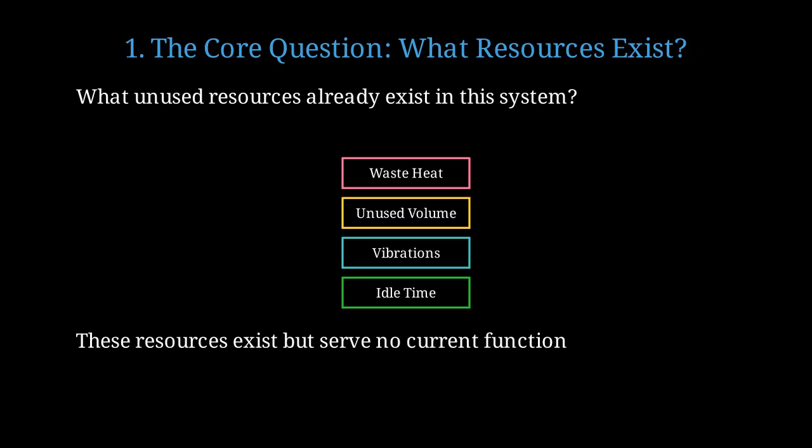Let's start with the fundamental question that drives this entire technique. What unused resources already exist in this system? This single question can unlock tremendous innovation potential. Common unused resources include waste heat from machinery, unused volume in containers, mechanical vibrations, and idle processing time. These resources already exist in our systems, but serve no current function, representing lost opportunities.

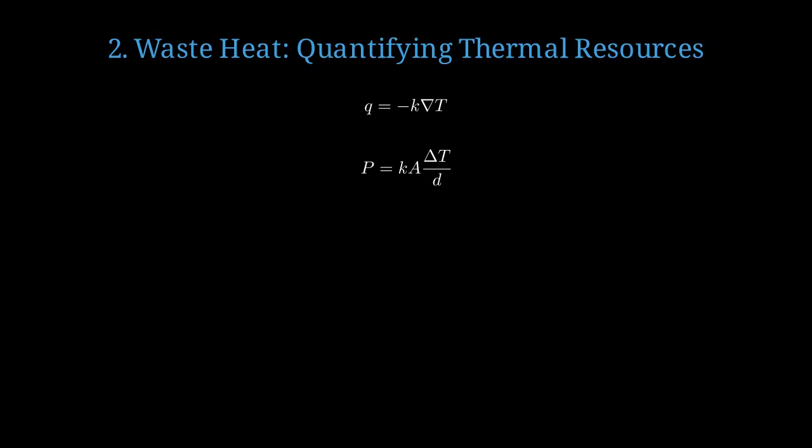Let's examine waste heat, one of the most abundant unused resources in industrial and consumer systems. Fourier's law describes heat transfer, where Q is heat flux, K is thermal conductivity, and nabla T is the temperature gradient. Power available from heat transfer equals thermal conductivity times area times temperature difference divided by distance. Consider a typical industrial motor with a hot surface at 80 degrees Celsius and ambient temperature at 20 degrees, creating a 60-degree gradient.

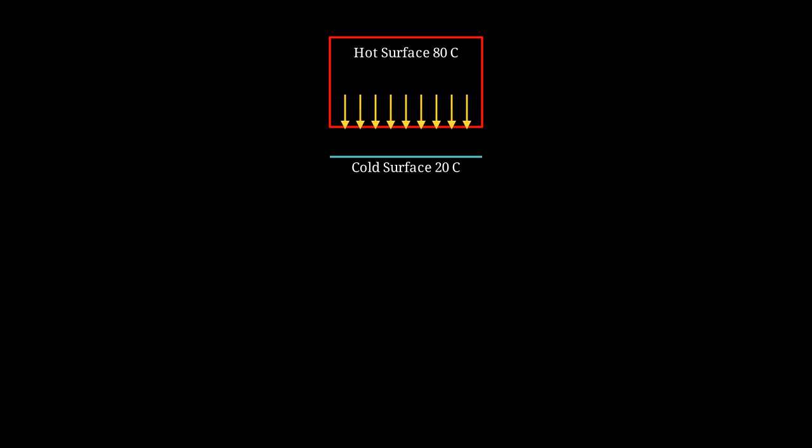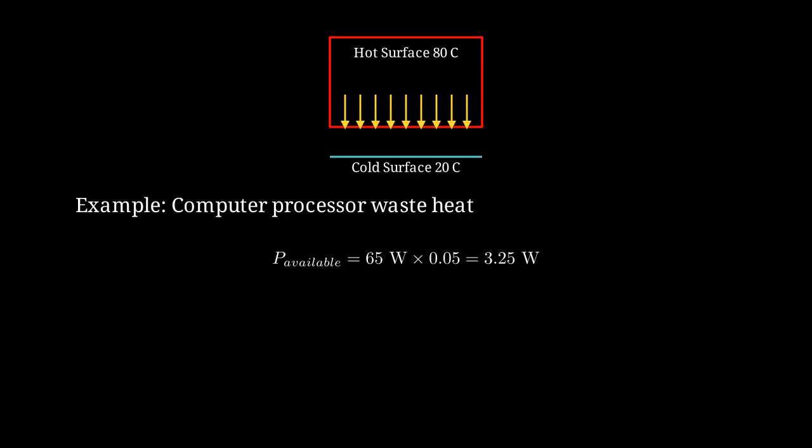A typical computer processor dissipates 65 watts of heat that could potentially be harvested. With thermoelectric generators at 5% efficiency, we can harvest about 3.25 watts from processor waste heat. What resources are we currently throwing away? In data centers, millions of watts of heat energy are simply vented to the atmosphere. A single megawatt data center wastes 8.76 gigawatt hours annually, equivalent to powering 800 homes for a year.

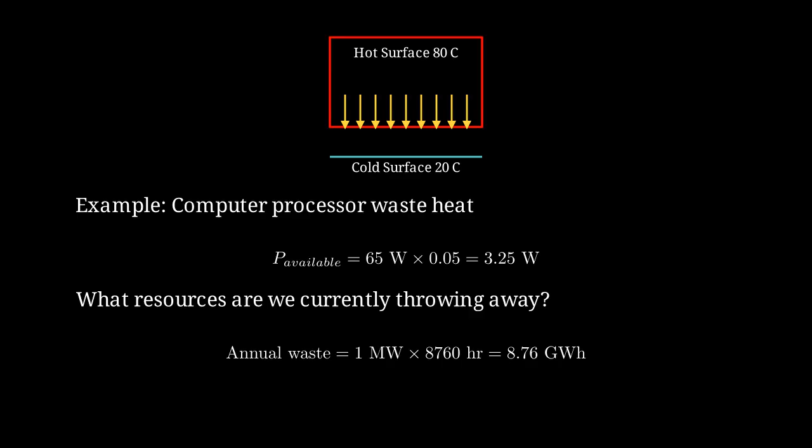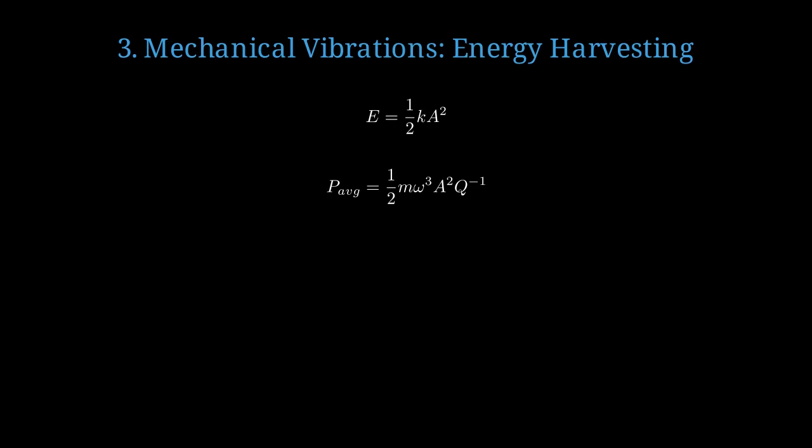Mechanical vibrations represent another significant source of harvestable energy in our environment. The energy stored in a vibrating system equals 1/2 times the spring constant times amplitude squared. Average power from vibration harvesting equals 1/2 times mass times angular frequency cubed times amplitude squared divided by quality factor. A vibrating mass on a spring can be modeled as a harmonic oscillator, with energy oscillating between kinetic and potential forms.

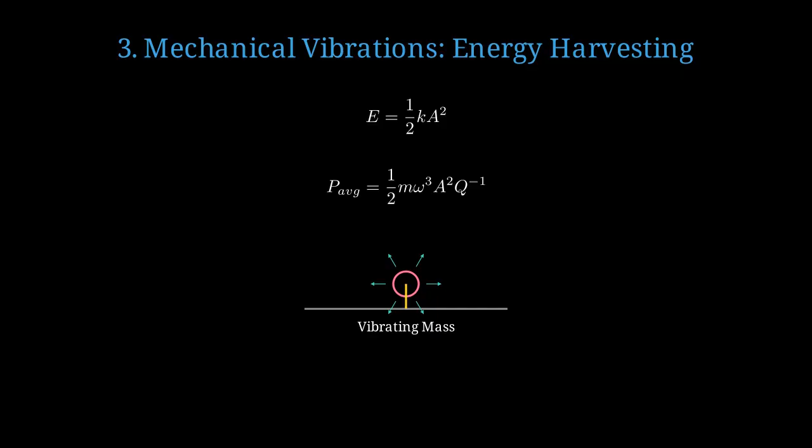Consider bridge vibrations at 50 Hz frequency with 0.5 millimeter amplitude from traffic. A 100-gram harvester on this bridge could generate 0.77 milliwatts, enough to power wireless sensors. Piezoelectric floor tiles in train stations harvest footstep vibrations, generating up to 5 watts per step. With 10,000 steps daily, a busy tile generates 25 kilojoules, powering LED lighting for the area.

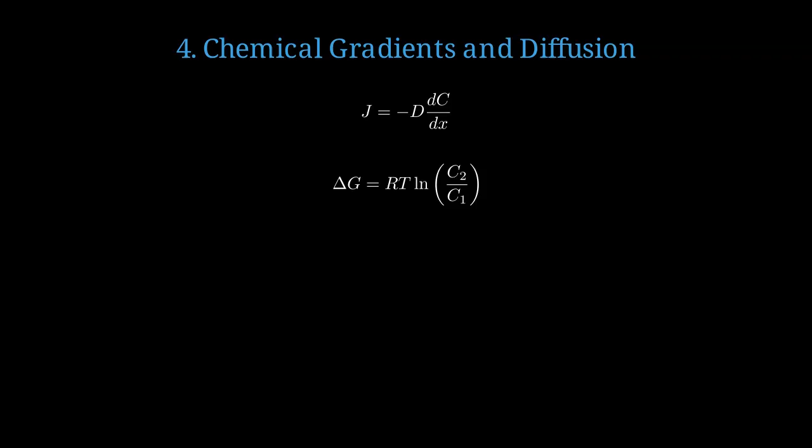Chemical gradients represent stored potential energy that can drive useful processes. Fick's first law describes diffusion, where J is flux, D is diffusion coefficient, and dC over dx is concentration gradient. The Gibbs free energy available from a concentration gradient equals RT times the natural log of the concentration ratio. Molecules naturally flow from high concentration to low concentration regions, and this flow can do useful work.

Where rivers meet oceans, salinity gradients contain enormous energy potential. A river flowing at 1,000 cubic meters per second into the ocean carries 2.3 gigawatts of osmotic power. What resources are we currently throwing away? Global rivers discharge enough salinity gradient energy to power 2 terawatts.

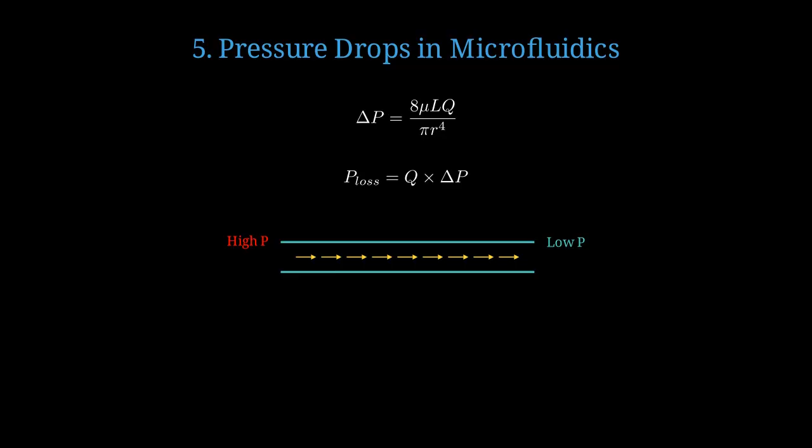Pressure drops in fluid systems represent wasted energy that can be recovered. The Hagen-Poiseuille equation shows pressure drop equals 8 times viscosity times length times flow rate divided by pi times radius to the 4th power. Power loss in a flow system equals volumetric flow rate times pressure drop. Fluid flowing through a channel experiences pressure drop due to viscous friction, dissipating energy as heat.

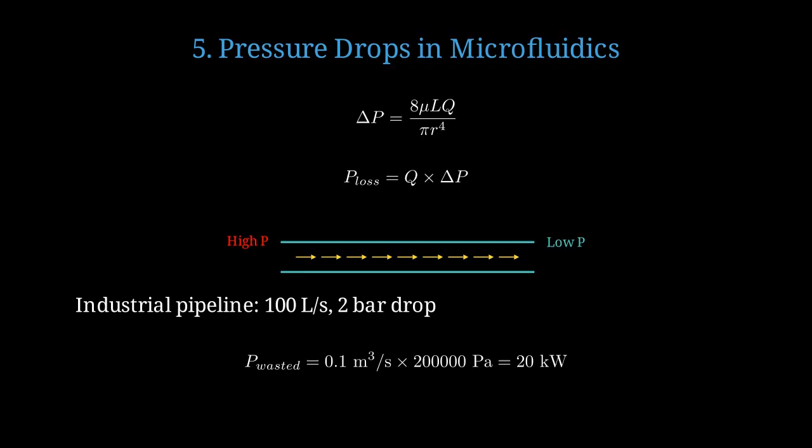Consider an industrial pipeline flowing at 100 liters per second with a 2 bar pressure drop. This system wastes 20 kilowatts continuously, which could be recovered with turbine generators. In microfluidics, we can redesign channels to use pressure drops for passive mixing instead of wasting energy.

Idle time represents an often overlooked resource in computational and manufacturing systems. Most systems alternate between active and idle states, with idle time representing unused processing capacity. System utilization equals active time divided by total time times 100%.

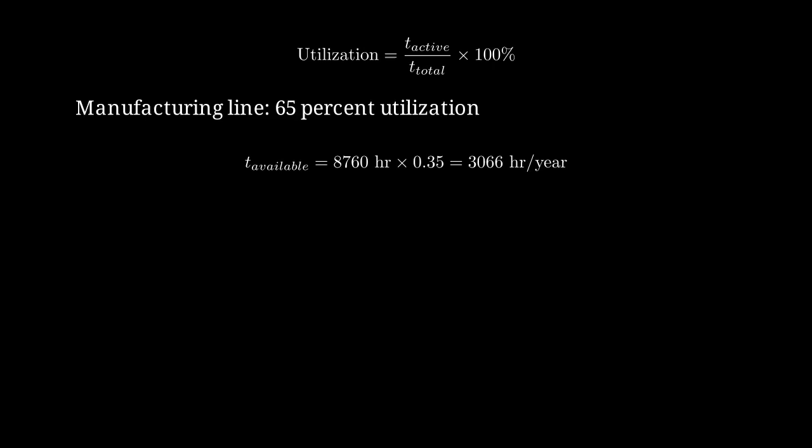A typical manufacturing line operates at 65% utilization, leaving 35% idle time. This represents 3,066 hours per year of unused capacity, equivalent to 128 full production days. By scheduling maintenance, testing, and secondary production during idle periods, we eliminate waste.

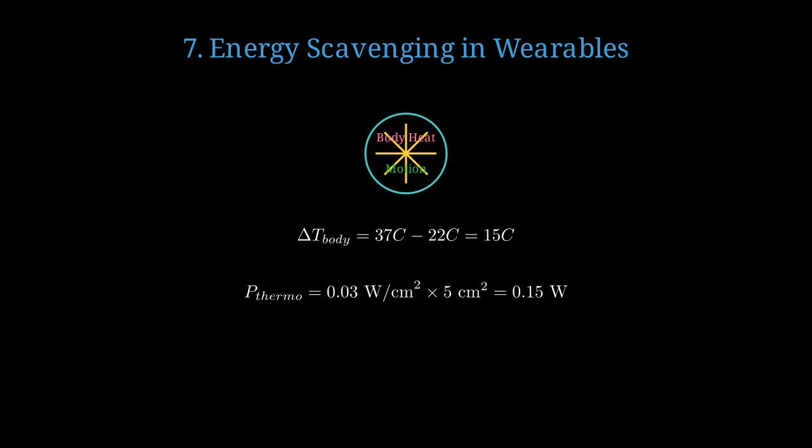Wearable devices demonstrate practical applications of multiple resource harvesting techniques. Wearable devices can harvest body heat through thermoelectrics and motion through piezoelectrics simultaneously. Human body temperature of 37 degrees minus ambient 22 degrees gives a 15 degrees Celsius gradient. A 5 square centimeter thermoelectric generator on skin produces 0.15 watts from body heat.

Human walking generates motion at 2 Hz frequency with roughly 5 centimeter vertical displacement. A piezoelectric harvester from walking motion generates an additional 0.05 watts. Combined harvesting provides 200 milliwatts continuously, enough to power smartwatches and fitness trackers indefinitely.

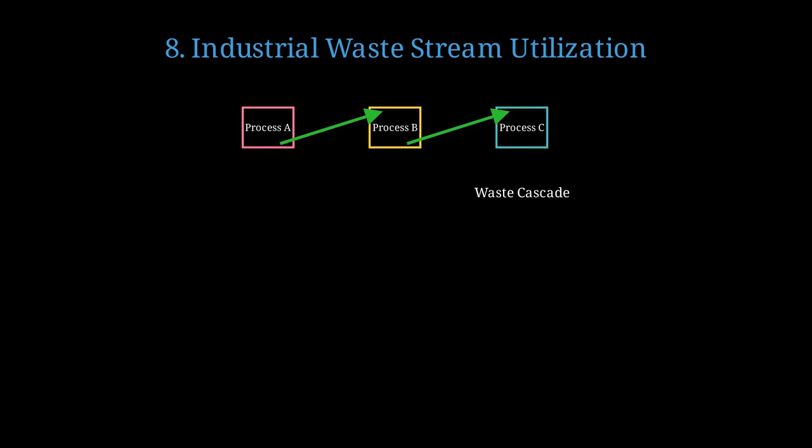Industrial processes generate numerous waste streams that can become valuable inputs for other processes. Industrial ecology uses waste cascades, where the waste output of one process becomes the input for another. A chemical plant producing 50 tons per day of CO2 waste can feed algae bioreactors. Algae can convert 60% of that CO2 mass into biomass, yielding 30 tons of algae daily. Converting 30% of algae biomass to biodiesel yields 333 gigajoules per day of fuel energy.

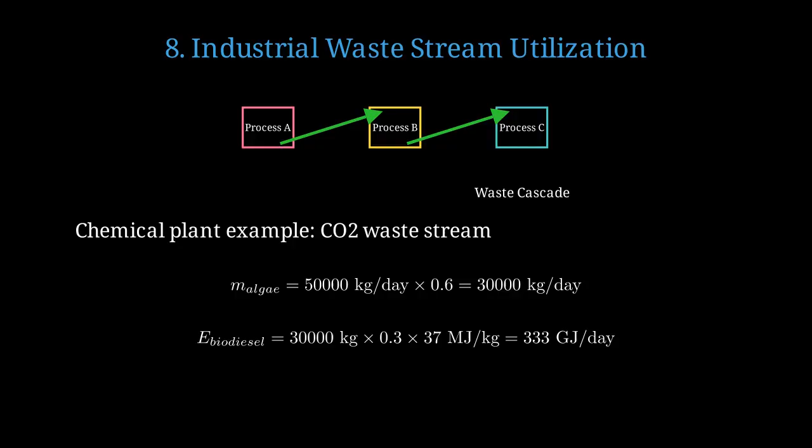What resources are we currently throwing away? Industrial CO2 emissions represent 37 billion tons annually of potential chemical feedstock.

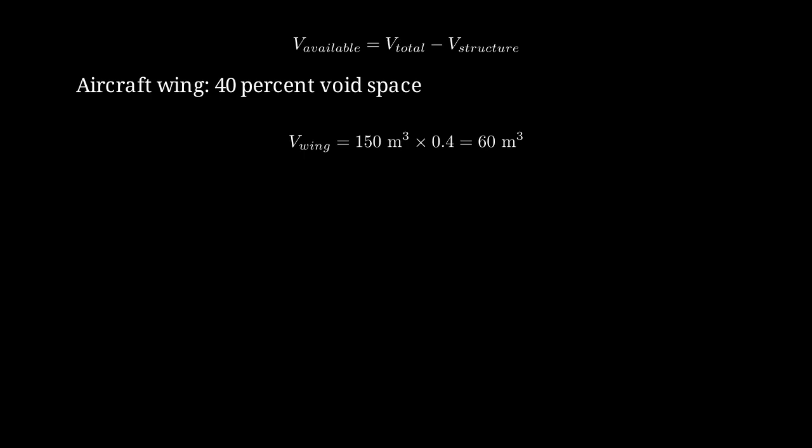Unused volume in structures and containers represents three-dimensional resources for additional functionality. Hollow structural elements contain significant empty volume that could house sensors, batteries, or thermal storage. Available volume equals total volume minus the volume occupied by structural material. Modern aircraft wings contain roughly 40% void space between structural ribs. A large aircraft wing with 150 cubic meters total volume contains 60 cubic meters of usable space. This space enables integrated fuel tanks, distributed avionics, and heat exchangers without adding external volume.

Even electromagnetic interference, typically considered noise, can be harvested as a power source. Power available from electromagnetic fields equals electric field squared divided by resistance. Rectifying antennas convert ambient radio frequency radiation directly into DC electrical power. Dense urban environments contain roughly 0.1 microwatts per square centimeter of harvestable RF energy. A 100 square centimeter antenna array harvests 10 microwatts, sufficient for ultra-low power sensors. Near cellular base stations, power density increases 100-fold, enabling milliwatt-level harvesting.

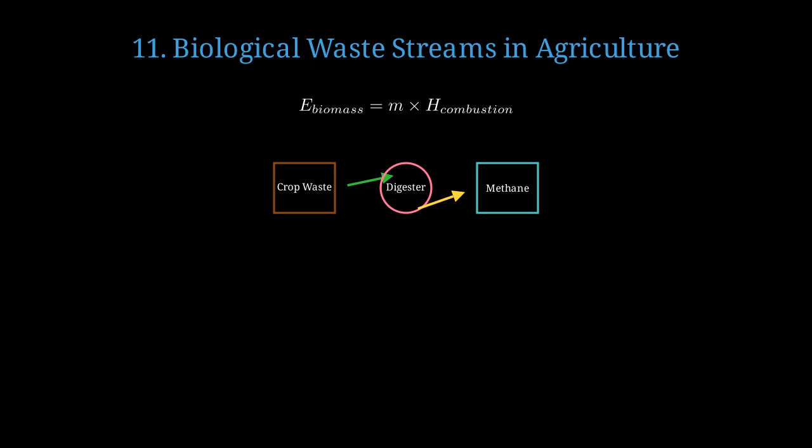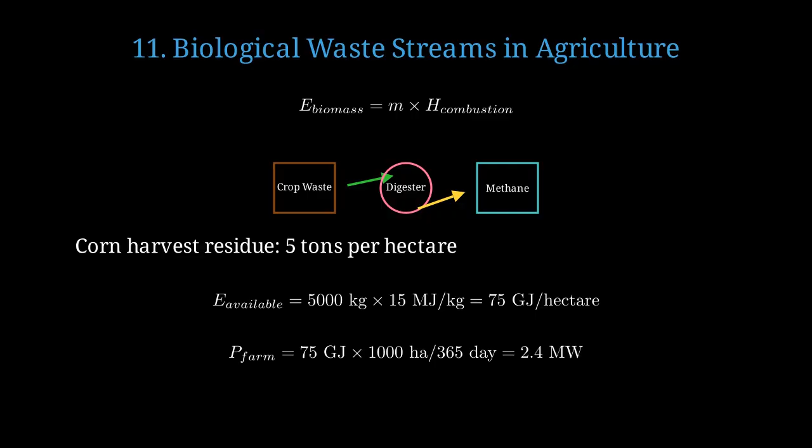Agricultural operations generate enormous biomass waste that represents concentrated chemical energy. Energy content of biomass equals mass times heat of combustion. Anaerobic digesters convert agricultural waste into methane gas, closing the carbon loop. Corn harvesting leaves approximately 5 tons of stover residue per hectare in fields. At 15 megajoules per kilogram, this represents 75 gigajoules of energy per hectare. A 1,000-hectare farm could generate continuous 2.4 megawatt power from crop residues.

What resources are we currently throwing away? Globally, we leave 5 billion tons of crop residue to decompose uselessly each year.

Sound waves carry mechanical energy that can be converted to electricity in noisy environments. Acoustic intensity equals pressure amplitude squared divided by twice the density times sound speed. Available acoustic power equals intensity times collection area. Acoustic harvesters use resonant structures to convert sound pressure oscillations into electrical current.

Heavy industrial environments commonly reach 100 decibel sound pressure levels. 100 decibels corresponds to an acoustic intensity of 0.01 watts per square meter. A 10 square centimeter harvester at 30% efficiency captures 3 microwatts from this acoustic field. These harvesters enable self-powered sensors for continuous noise monitoring in factories.

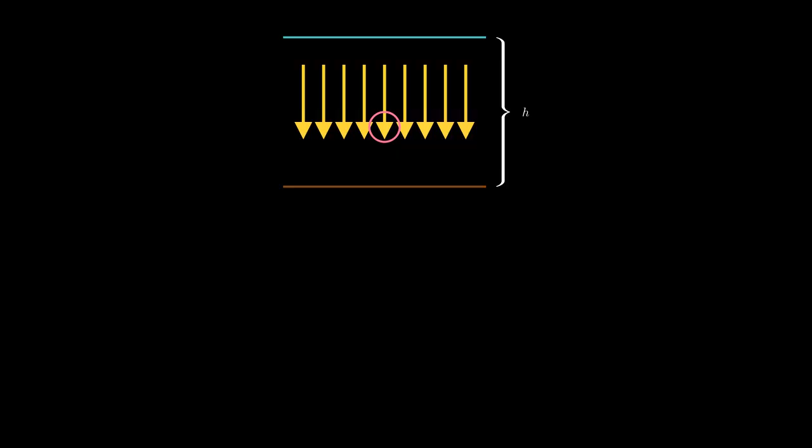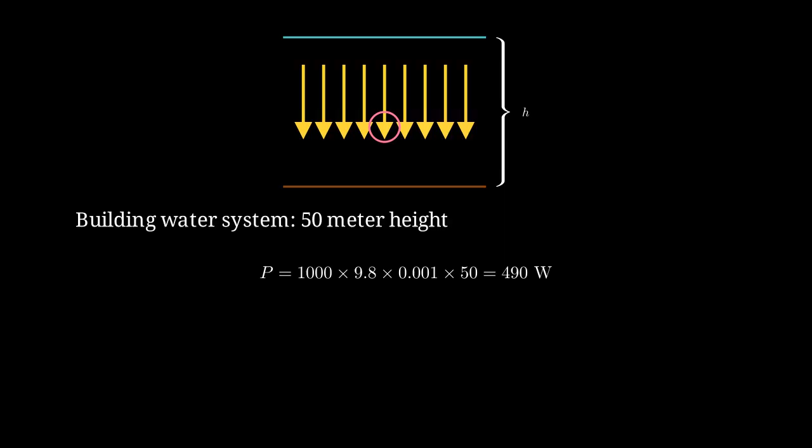Gravitational potential energy from height differences represents a fundamental unused resource. Gravitational potential energy equals mass times gravitational acceleration times height. Hydroelectric power equals density times gravity times flow rate times head height. Water falling through a height difference releases potential energy that turbines convert to electricity. A tall building with water storage at 50 meters height stores significant gravitational potential. Flow of 1 liter per second through a 50-meter height drop yields 490 watts of recoverable power. Installing microturbines in building downpipes recovers energy from water distribution systems.

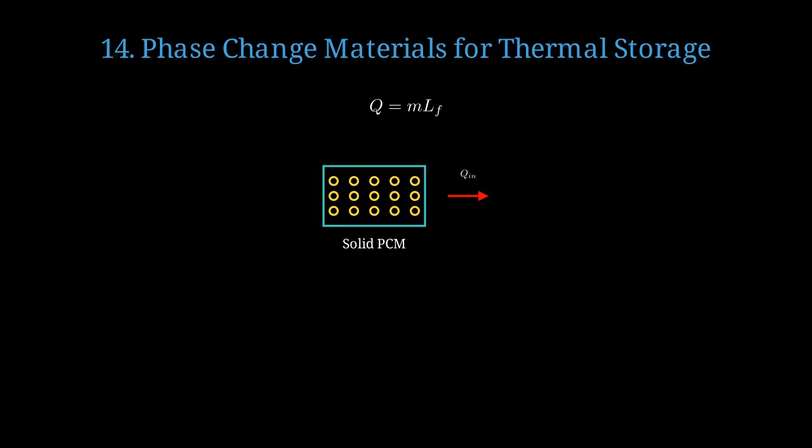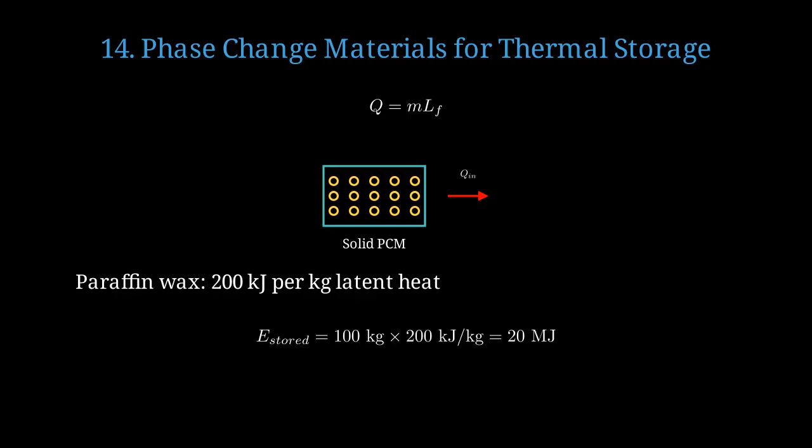Phase change materials store and release large amounts of thermal energy at constant temperature. Heat stored during phase change equals mass times latent heat of fusion. Phase change materials absorb heat during melting without temperature rise, storing thermal energy efficiently. Common paraffin wax stores 200 kilojoules per kilogram during its solid-liquid phase transition. A 100 kilogram thermal battery using paraffin stores 20 megajoules of thermal energy. PCM systems capture daytime waste heat and release it for nighttime heating, matching supply with demand. Modern PCM thermal storage systems achieve 85% round-trip efficiency.

The true power emerges when multiple resource streams are integrated into cohesive systems. System integration of multiple resource harvesting techniques amplifies overall efficiency and resource utilization.